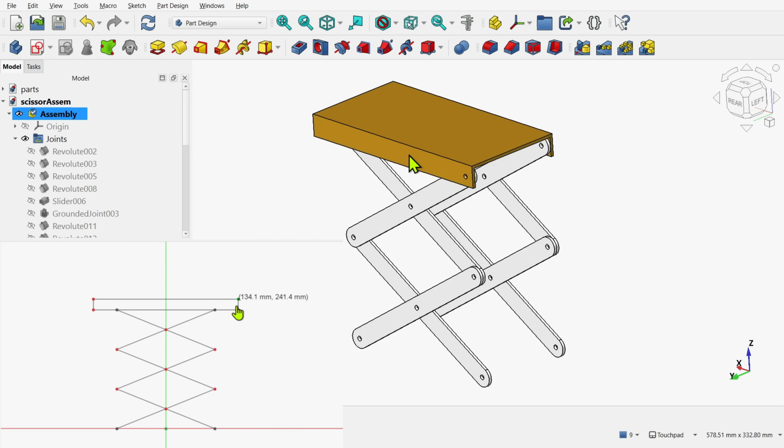To properly design and understand how mechanics work and how they will behave in your assembly, the FreeCAD Sketcher is actually a better starting point than jumping straight into designing parts. The reason is the Sketcher constraint solver. Mechanical systems are all about fixed lengths, pivots and relationships, and that's exactly what the solver is designed to handle. By locking down distances and anchor points, a simple sketch can become a working, interactive simulation.

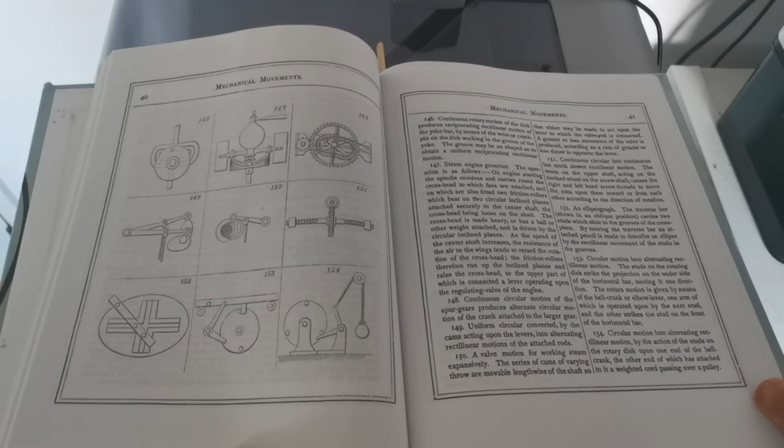If you're interested in using FreeCAD to design models with assemblies that have mechanical linkages, then Henry T. Brown's book, 507 Mechanical Movements, is an excellent place to start. It's packed with hundreds of classical mechanisms and really serves as a catalogue of the core ideas behind mechanical design.

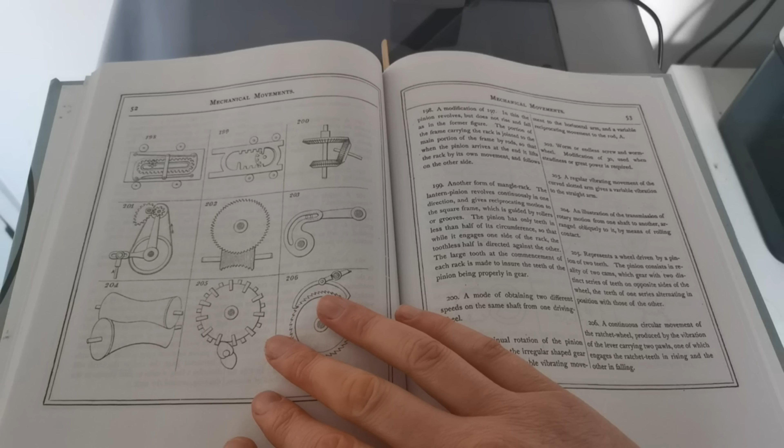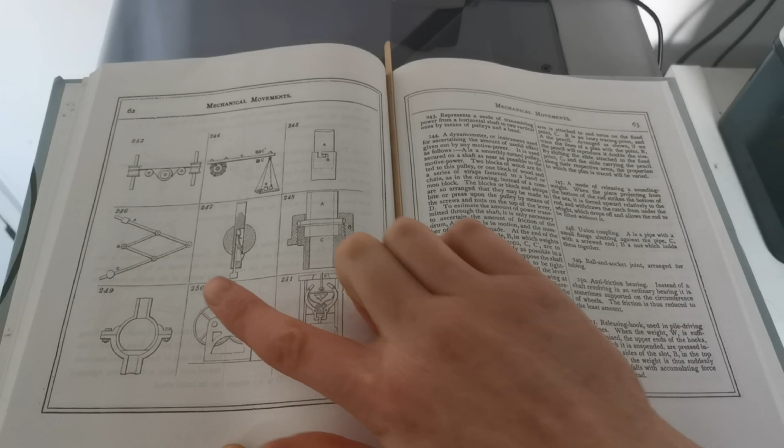From Brown's book, Movement 246, the Pantograph is a perfect demonstration. On paper, it's shown as a set of linked bars, used to copy drawings at different scale. In a static 2D diagram, it doesn't look like much, but once you recreate it in the Sketcher, it comes to life. In this tutorial, we're going to create that mechanism in the FreeCAD Sketcher.

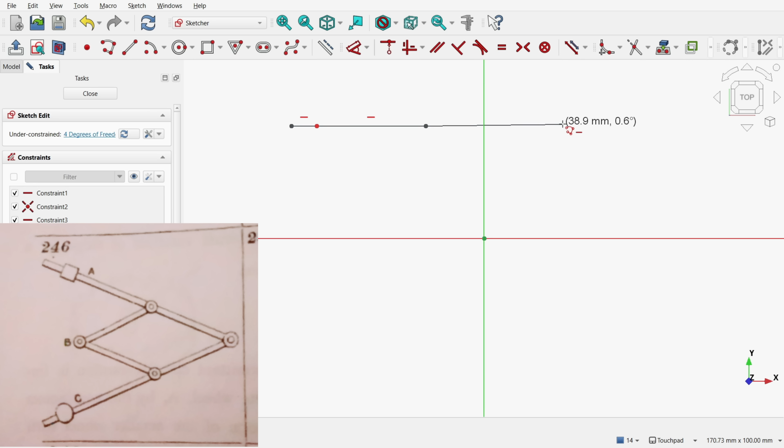First of all, let's start the polyline. This is going to be the top arm. So we need a point for the pen, point A. Then we need a pivot point that attaches our short arm. And then we need an end point. Now we can start on the other arm and we just match the geometry. Let's right click to cancel and right click to cancel the tool.

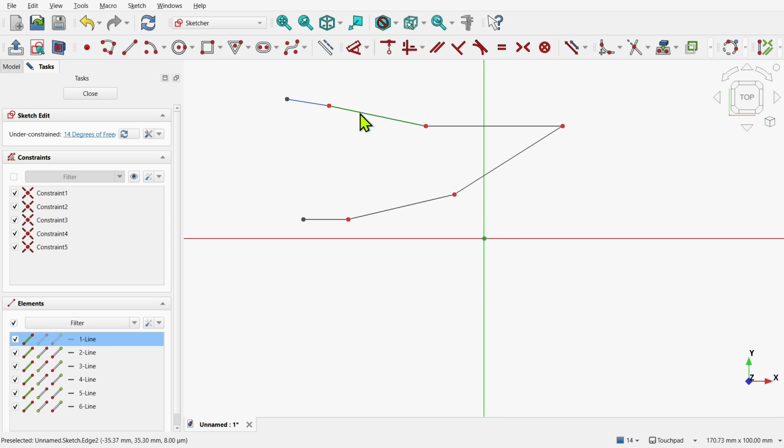Now, because of the auto constraints, we've got some horizontal constraints here, which we don't want. Let's select them and hit delete on the keyboard or just delete them from the constraints. With those gone, we need to add some parallel constraints to keep the individual lines parallel. So the top arm using parallel and the bottom arm. Now don't worry about how many constraints you see on screen. We can hide these later.

So we have our two arms, but we need to size these and keep this pivot point in the middle. So to do that, let's take the start point and the end point, the point we want to keep in the middle, and use a symmetry constraint. Repeat on the other side. And we can add some length in here. So from here to here, let's set a length. And I want this not as a horizontal length, but as a diagonal length.

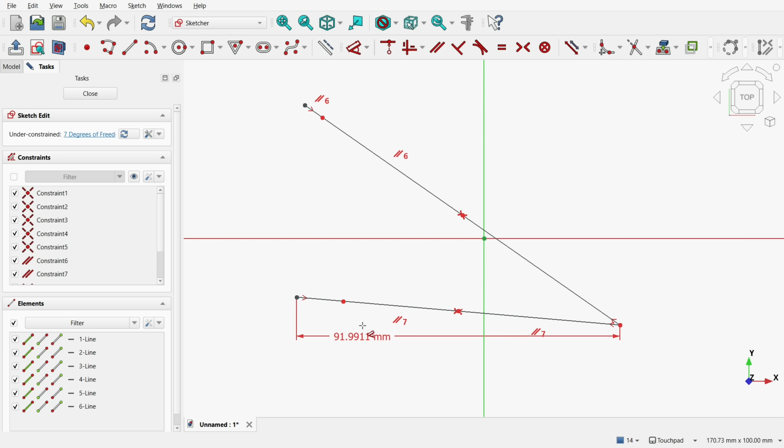Now, if you can't get the diagonal length because of the angle, let's make the angle greater. This will mean that it's easier to create a diagonal length. We'll set that to 200 millimeters. Right click to cancel the tool, use the equal constraint. We know we need these two lengths equal, this one in here and this one. And also we can set these two equal as well. So we've got one length controlling both.

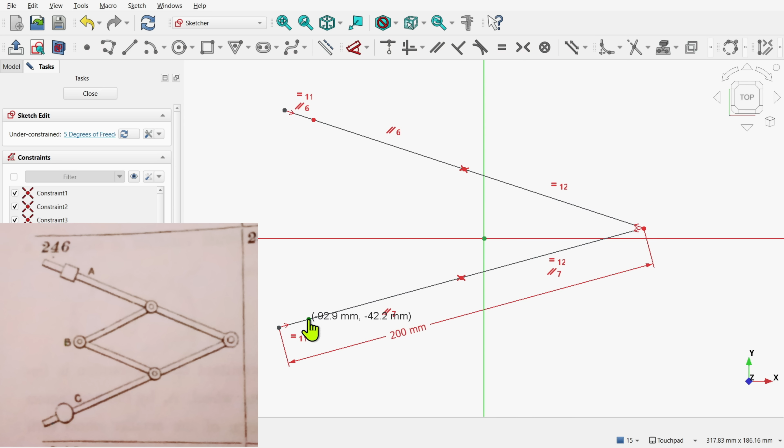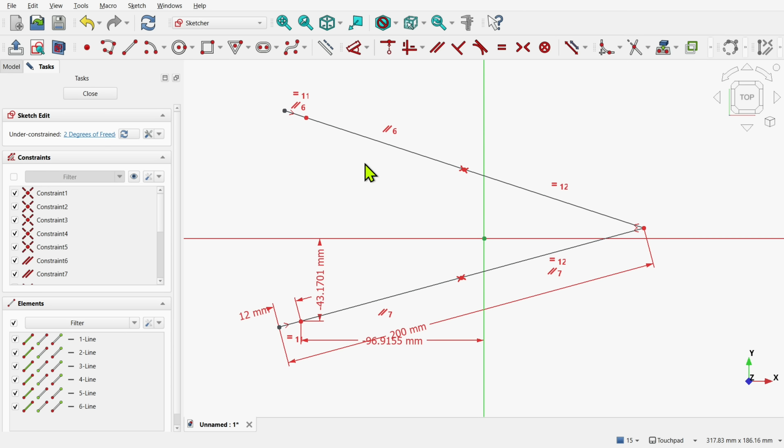So this is point A and this is point C, which have to be kept the same length away from the endpoint. We can take those 2 points and place a distance constraint, making sure we get distance, and set this to, say, 12 millimeters. We also need to fix this point. Point C is the fixed point, so we take this point, set some dimensions, or we just use the lock position. That locks that into position. Don't worry about all these constraints because we can hide them when we start manipulating the mechanism.

Let's show those again. Next comes the two arms for tracing, which is a standard line connected up to this point and this one here connected together. Right click to cancel, and these need to be the same length. Take both those lines, make those equal. See, already it's starting to work. We need to set some length here.

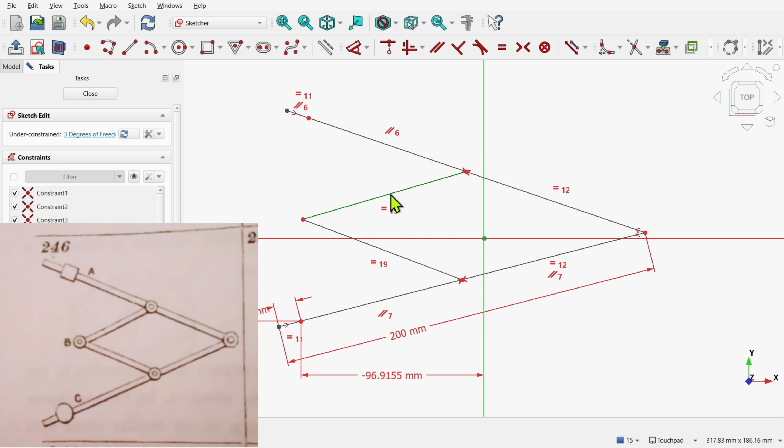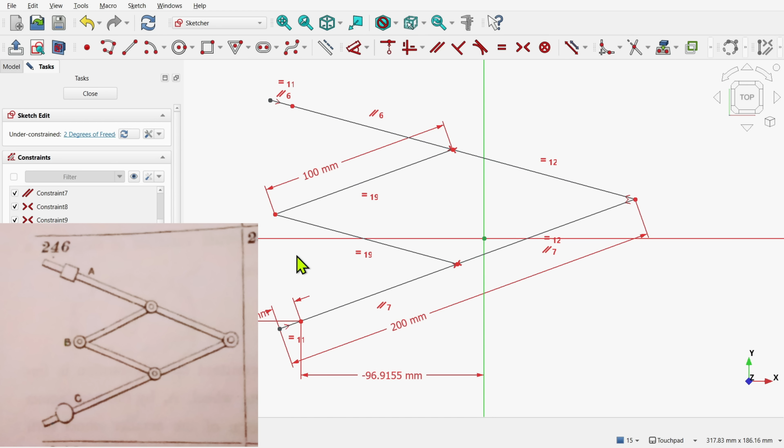Take the line, set a distance along it, make sure you don't get the horizontal distance, and we'll set that to 100 millimeters, half the length of the long arm. Let's right click to cancel the tool. So this point here is point B, the tracing point. This point is the fixed point, and this point is where the pen is going to be held.

If we wanted to, we could add some geometry just to define some of these points. Place a little circle in here for the pen. 5 millimeters will do us. Let's hide all the constraints. We have our finished mechanism. Now it's time to test the mechanism. We can do that in the Sketcher as well.

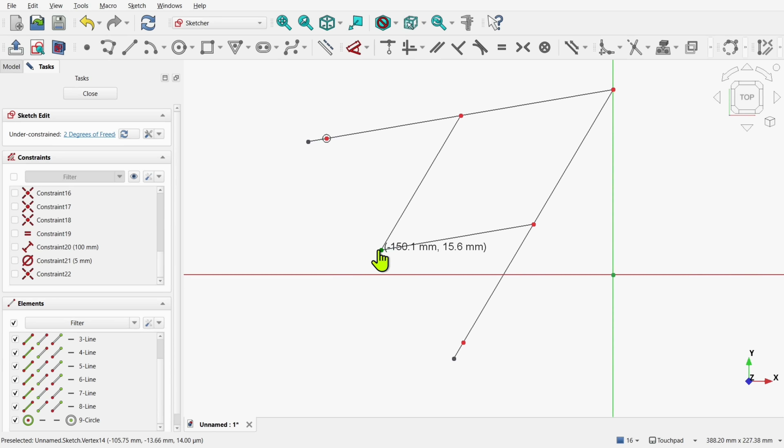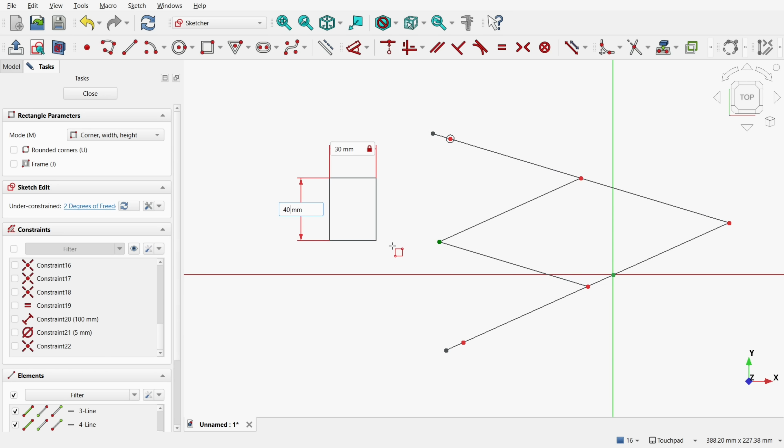As we can see, it's moving, and we have to just be wary of where the points cause problems. So if we bring this point down here, then we're going to get some problems. So it's best to try it around about here. Let's add something to trace, which is going to be a rectangle of around about 30 by 40 millimeters high. See that we can trace that and we don't get any problems.

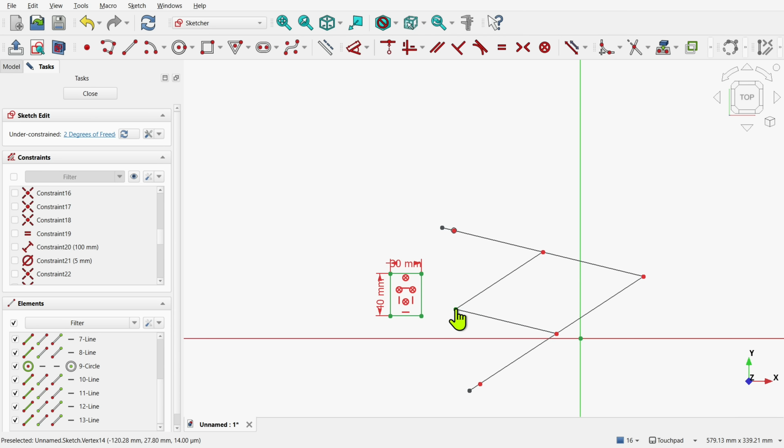That's fine. I can block this geometry, make sure nothing's selected. Select each of the edges, use the block constraint. This is not a shortcut to fully constrained. We have to use this with caution. There's only certain circumstances that we use the block constraint in. So let's look at our starting point, which is here. You can see the point of the pen is there.

Let's add another rectangle. I'm going to move the point into position here, and we'll move this across this point. And you can see the good thing is that we're on this line here. So I'm going to stop this point from moving by blocking this edge. We can't move this up now, we can only move it inwards. Take the point and move this up to the top.

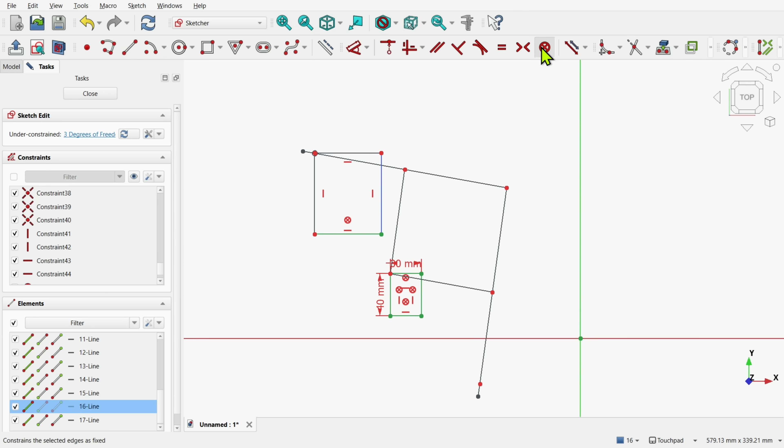Now this line is blocked, so let's take the block and hit delete on the keyboard and bring the top down. But let's block this one first. Make sure nothing's selected first. And select that one. We'll just bring this down and block the other edge. So now what we should have is a representation of the traced geometry. We can see the mechanism is actually working.

So that's how to use FreeCAD Sketcher to test and build mechanisms before we start creating our parts and testing them in an assembly. I highly recommend the book, and I found it absolutely fascinating to go through.